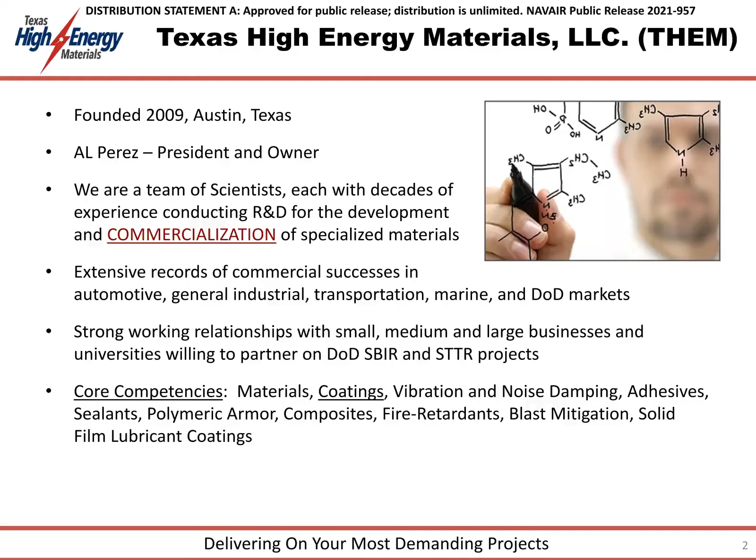Together, he and I were one of the first companies ever selected by the Air Force for their new AFWERX SBIR program. Our Phase 1 project was compressed to 3 months, and the Phase 2 was compressed to 12 months. For that project, we developed a corrosion-inhibiting plasma electrolytic oxidation coating for light alloy secondary power system housings of fixed-wing combat aircraft.

The V-22 tilt rotor Osprey provides the U.S. Navy with vertical takeoff and landing capabilities and the ability to hover. It is uniquely coupled with the speed and range of propeller-driven fixed-wing aircraft. The unique ability of the V-22's rotors to tilt 90 degrees between horizontal and vertical orientations enables the aircraft to offer the best of both worlds of fixed-wing and rotorcraft platforms.

Unfortunately, low-level hovering kicks up large amounts of sand, dust, dirt, mud, insects, and other foreign object debris, which gets ingested into the vertically oriented engine compartment. In addition, engine oils, fuels, and hydraulic fluids are, after escaping through old or compromised seals, inadvertently dispersed throughout the engine compartment and onto components.

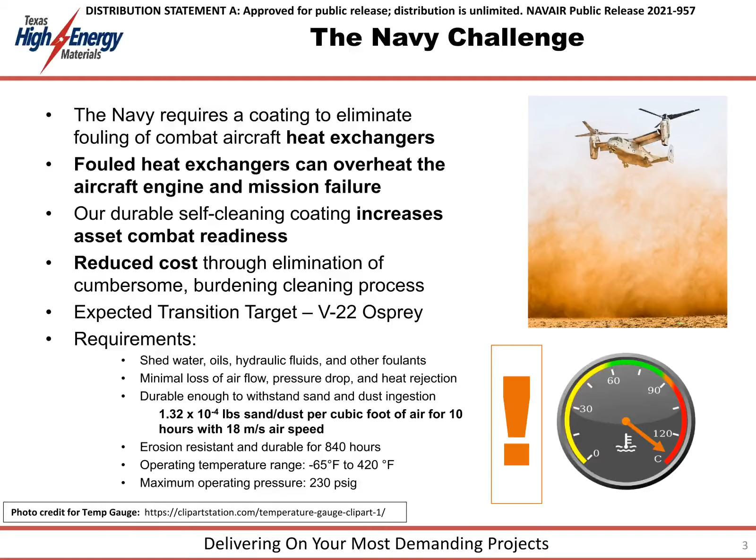The combination of oils, solid debris, and mud build up on and foul the small aluminum tubes and fins of the heat exchanger surface. Fouling of the heat exchanger rapidly diminishes the cooling capability of the unit, which has led to grounded aircraft and unexpected mission terminations.

The heat exchanger of the V-22 is not unlike traditional radiators found on passenger vehicles and semi-trucks. It is composed of fluid tanks with hot fluids that are circulated through the heat exchanger to reduce fluid temperature. Aluminum fins commonly found on radiators are also immediately recognizable on the V-22 heat exchanger.

To prevent the costly fouling on the heat exchanger surface, we have been contracted to develop a durable, omniphobic coating that will immediately shed all water and oil-based fluids and pastes encountered by the heat exchanger, as well as bioorganic materials such as insects and bird strike debris. Note that omniphobic simply means an aversion to everything, in our case, resistance to both water-based and oil-based fluids, as well as solid organic and inorganic materials.

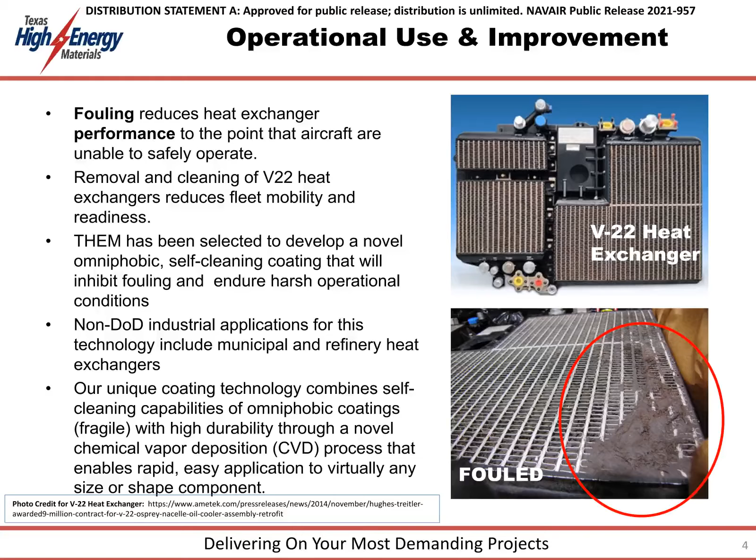The concept of self-cleaning omniphobic coatings is not new, and has been observed in nature for hundreds of years. The natural film on the surface of a lotus leaf is an excellent example of a self-cleaning coating. The principle behind natural and synthetic hydrophobic, lipophobic, and omniphobic coatings is focused on surface tension.

We are all familiar with water beading up on a freshly waxed automobile. The applied wax coating has a lower surface tension than water, which causes the water to bead up rather than wet out and form a continuous water layer. The beads of water quickly and easily roll off the surface of the wax car panel.

Dirt contained in water, also known as mud, also beads up on the wax surface and is easily shed. Rain-X is another good example of a hydrophobic coating that causes water to bead up and shed off a windshield surface. Omniphobic coatings have the unique ability to cause both water and oil to bead up on the coated surface and to easily shed off.

As material scientists, we use a goniometer, an instrument with a funny name, to measure the contact angle of a fluid on a surface. We correlate surface tension from the measured contact angle. The instrument measures the contact angle of a fluid on the surface, either water or oil, which provides an indication of how well the coating under the drop can cause the fluid to bead up.

Omniphobic self-cleaning coatings are a rapidly emerging technology and have many applications still waiting for their widespread availability. Unfortunately, there remains one major shortcoming of omniphobic coatings. They are fragile and have very little to no abrasion resistance. The premier abrasion-resistant coating chemistry used for aerospace applications is polyurethane.

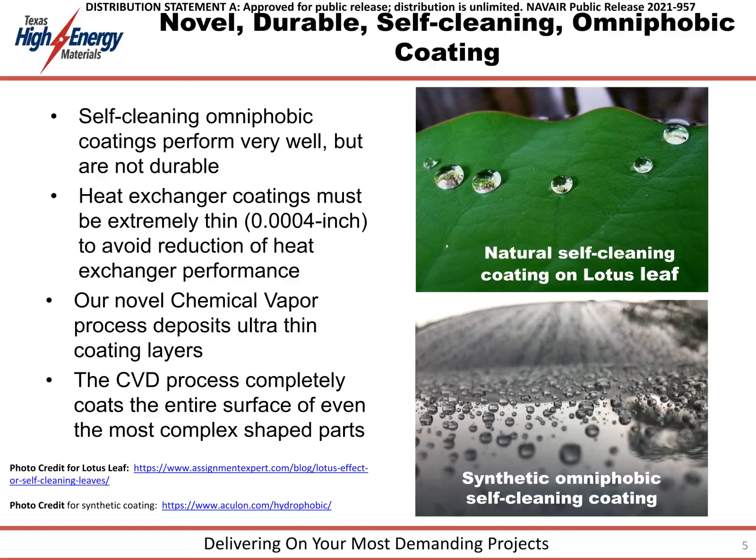Our goal is to develop an omniphobic self-cleaning coating with the durability of polyurethane, to prevent fouling of V-22 heat exchangers after repeated abrasion by sand and debris being ingested by the hovering aircraft. As an added challenge, our coating must be very thin.

The polymers we use for coatings are predominantly insulators of both heat and electricity. A thick coating on a heat exchanger will diminish the ability of the unit to reject heat of circulating fluids flowing through the exchanger. Because the tubes and fins of the heat exchanger are small, with some positioned deep within the unit, traditional coating application techniques like brush or spray are unable to provide complete coverage.

Therefore, we have turned our application approach to chemical vapor deposition, also known by its acronym CVD. In this application method, the part to be coated is inserted into a closed chamber and under vacuum. The chemical reactants that will form the coating are vaporized, allowing them to permeate and deposit onto all exposed areas of the part. Think of it as a way of immersing the part to be coated into a chemical bath that is a vapor fluid rather than a liquid fluid.

The progress of our research and development project finds us at a TRL level 4, and at the end of our project is expected to reach TRL 8. The project Phase 2 base has an end date of August 2022, and the Phase 2 option has a February 2023 end date. We remain hopeful that the global supply chain disruption caused by the COVID pandemic will not adversely affect our project. To date, we remain on time and under budget.

To date, we have completed our first 3 project milestones and are nearing completion of the 4th. The first milestone was to determine the coating chemistry that could best meet all performance aspects of the project. The second milestone was to apply the coating on 6061 T6 aluminum test coupons, which are representative of the same material used in the construction of the heat exchanger tubes and fins. The third milestone was to evaluate the performance of our coating technology on representative coupons.

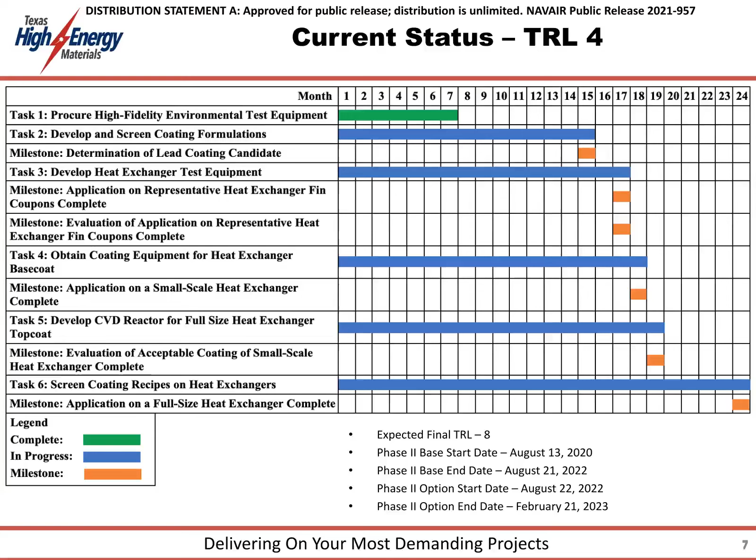The key feature of our novel coating is its omniphobic self-cleaning capability combined with the durability of wear-resistant polyurethane coatings. As we previously stated, currently available omniphobic coatings provide excellent anti-fouling performance, but are unable to endure even mild abrasion wear. Our coating technology ties the unmatched abrasion resistance and durability of the best polyurethanes used in aerospace applications to the self-cleaning performance offered by existing omniphobic coatings.

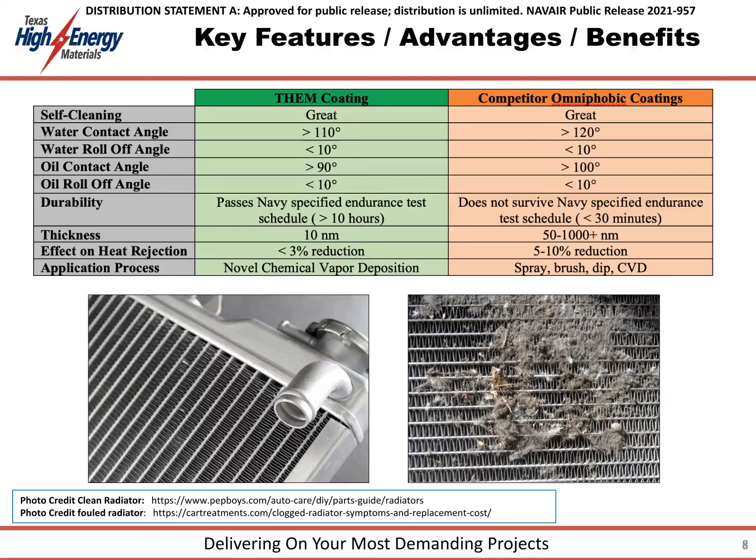Our product also offers very low thickness profiles of approximately 10 nanometers, which prevents it from negatively affecting the performance of the heat exchanger to cool fluids flowing through the unit. Our transition plan to PMA 275 V-22 Osprey includes successful flight qualification tests by the end of the project. Our project technical point of contact, Mr. Kurt Prescher, is our primary transition advocate.

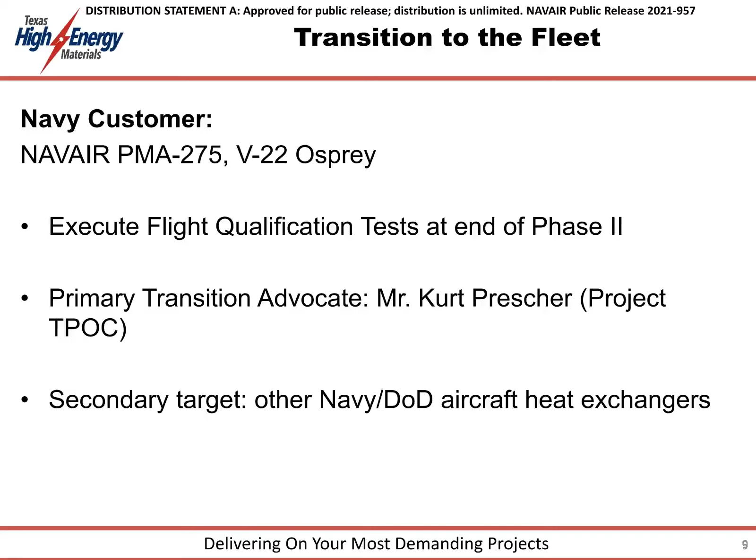Our novel self-cleaning coating technology will also have immediate performance benefits to other aircraft also afflicted by fouled aluminum heat exchangers, or other aluminum engine components that operate near the same temperature ranges of the V-22 heat exchanger. This includes the H-1, UH-60, CH-47, and CH-53 helicopters, as well as the emerging Defiant X and Raider X vertical lift aircraft. All of these aircraft kick up sand, dirt, and debris at low altitude hover, which produces a sandblast type of wear on critical heat exchangers and other drivetrain components.

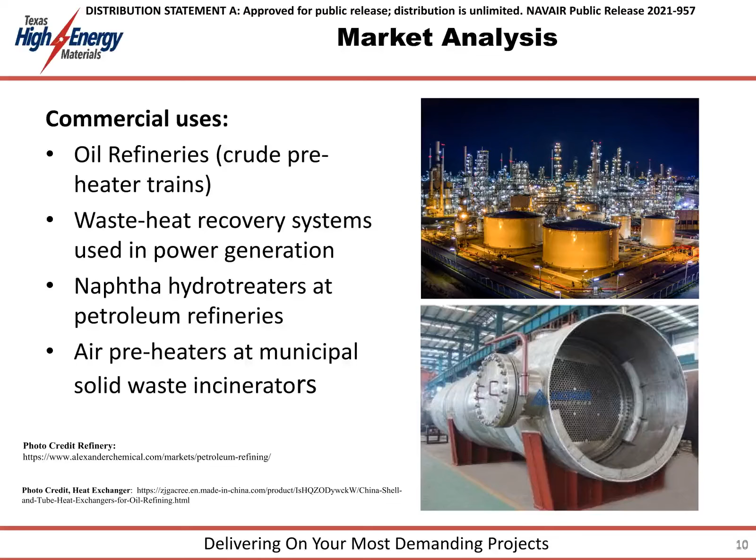A durable, omniphobic, self-cleaning coating will also be highly beneficial and cost-effective for heat exchangers found in non-DoD applications, including oil and gas, power generation, refineries, and municipal facilities that utilize aluminum construction heat exchangers. In transitioning our coating technology to the Navy fleet, our technical team will design and deliver the hardware equipment necessary for proper coating application, including user-friendly software that can be used at the maintenance depot level.

Training in the proper use of the application equipment and safe handling and storage of the chemicals used to produce the coating will be provided. Direct interaction with manufacturers of heat exchangers will provide the opportunity to institute industry-recognized quality programs and serve to expedite the transition of the coating to the fleet. Production can be ramped up in under 20 months. Coating application equipment can easily be designed to accommodate even the largest engine components.

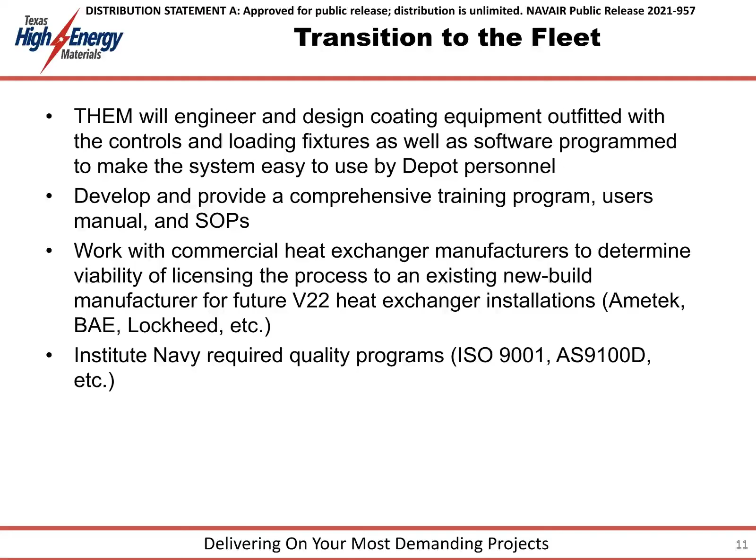Keep it flying, keep it clean.